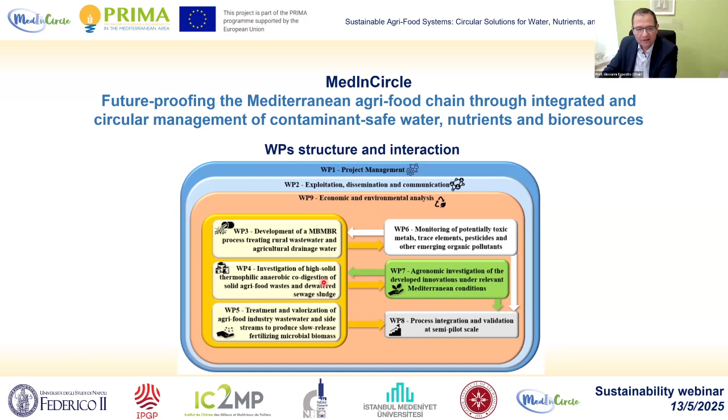Then we will move to working package 6, where Professor Erkan will focus on the toxic metals, trace elements, pesticides, and other contaminants that we want to remove from the water and solid before using them in the field. Last but not least, Professor Di Capua will focus on working package 4, on the high solid thermophilic anaerobic digestion to produce the digestate that we will recirculate in the field.

So here you have the program. I would like to soon give the floor to Professor Erkan to start with his presentation.

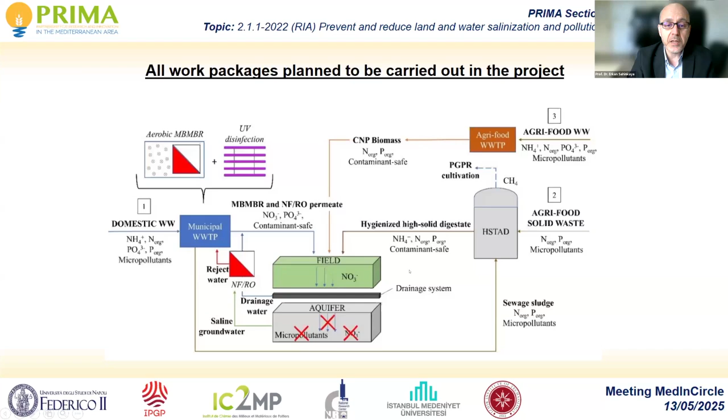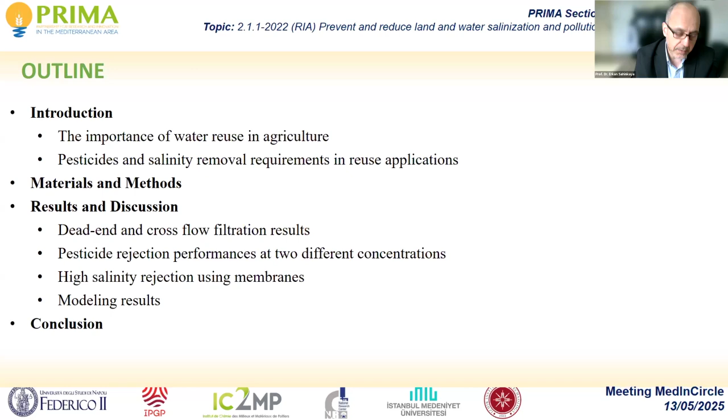Water scarcity is intensifying due to climate change, population growth, and agricultural intensification. Water reuse and recovery for irrigation purposes is a strategic need. Recovery and reuse ensure long-term water security in agriculture, so we have to focus on water reuse and recovery.

Reuse of drainage water is limited by residual agrochemicals, mainly pesticides, so pesticides and salinity should be removed if we want to use them for irrigation purposes. Modern agriculture relies heavily on pesticides for productivity, but their presence in drainage water poses both environmental risk and public hazards.

The use of pesticide is increasing every day. For example, in 2014 pesticide use was 2 million tons, but it increased to 3.7 million tons in 2022. So its usage is increasing every day.

Pesticide application is particularly high in developing countries, and lack of regulation and safe management practices increases contamination risks, so drainage water becomes a carrier of chemical pollutants. When we look at the breakdown of pesticide usage, most is herbicides around 53%, then fungicides 22%, and others a bit higher than 20%.

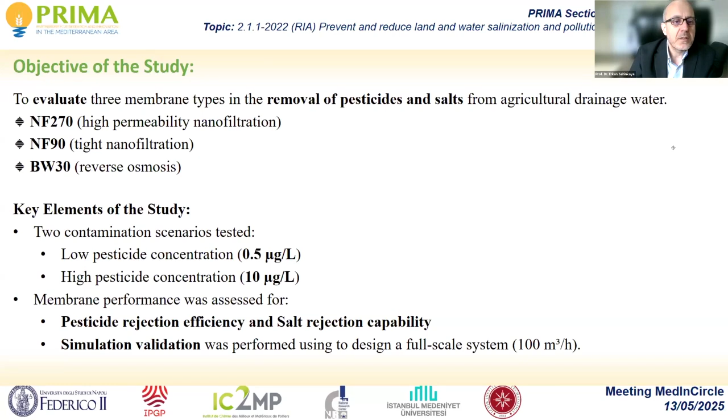For these purposes, we have selected 5 different pesticides: alachlor, atrazine, chlorfenvinphos, imidacloprid, and chlorsulfuron. Each pesticide has different molecular weights. If you look at the molecular weights, alachlor is... imidacloprid is the smallest pesticide, and chlorfenvinphos has the highest molecular weight.

In membrane application, not only molecular weight but also log Kow values, solubility, and other characteristics are important. The highest log Kow values belong to chlorfenvinphos, and the lowest are imidacloprid and chlorsulfuron. So molecular weight and log Kow values are important parameters in determining rejection performance in membrane processes.

This is the synthetic drainage water prepared in the laboratory. These characteristics are based on our field experiences. We have taken samples from both Şanlıurfa and İzmir in order to determine the characteristics of drainage water. As I mentioned, 3 different membranes have been used, 2 nanofiltration and 1 reverse osmosis.

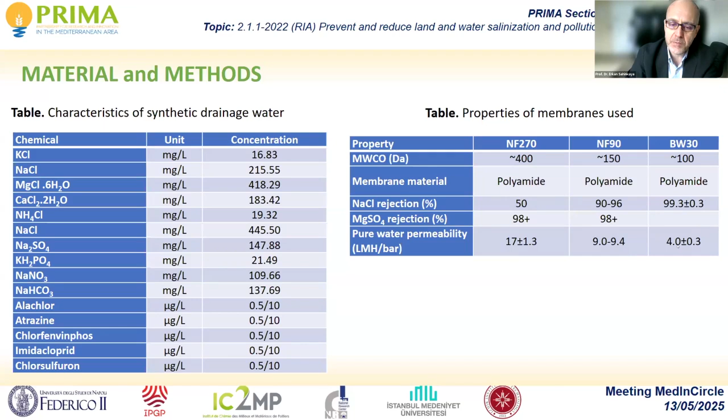When we look at the pure water permeability, nanofiltration 270 has the highest water permeability because it's the loosest membrane, and BW30 is the tightest membrane, with water permeability of only 4 LMH per bar. Here are the salt rejection performances. The best one is BW30, but it has the lowest water permeability.

In the study, we used dead-end and cross-filtration devices. In dead-end filtration, water is put into the holder of the membrane unit, and pressure is applied. Depending on the water recovery rate, the concentrate stream remains in the holder.

In cross-flow filtration, we used complete recycle mode. In this study, we returned both permeate and concentrate to the feed stream, trying to observe the steady state performance of the filtration processes.

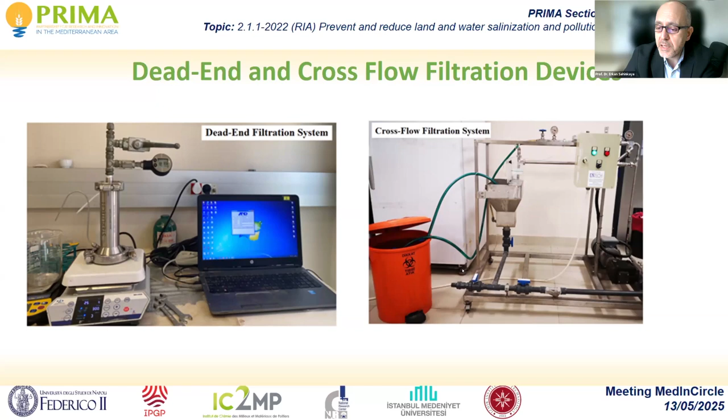As mentioned, we used two different contamination scenarios in determining pesticide rejection performance of drainage water. We also used very high saline groundwater and tried to remove salinity using reverse osmosis membrane, mimicking Egyptian saline groundwater, since one of our colleagues is from Egypt, where they have very high salinity groundwater that cannot be used for irrigation. We tried to use membrane processes to remove salinity and make it applicable for irrigation purposes.

Let's start with the pesticide rejection performance of nanofiltration and reverse osmosis. This is NF270 membrane performance shown for salinity removal and filtration performance. Flux decreased to around 60 LMH under 15 bar. Salinity removal was only partial, with chloride concentration decreasing from 600 to only 400 milligrams per liter.

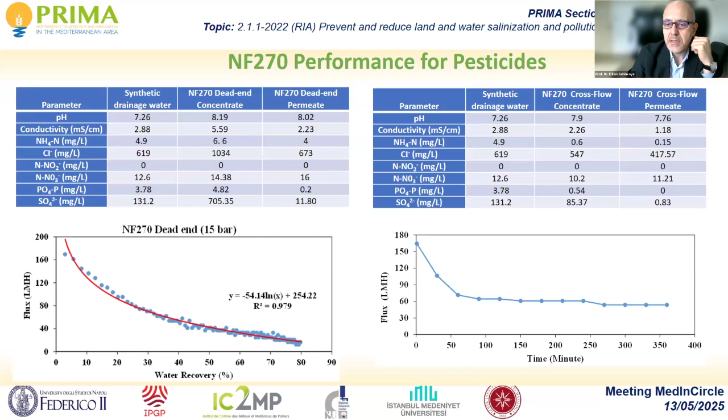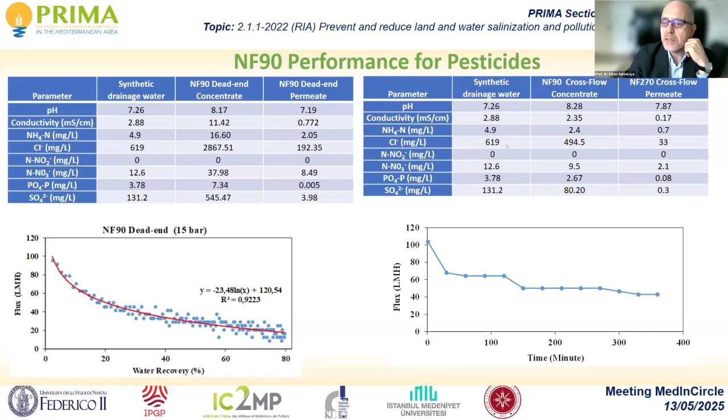For the other NF membrane, nanofiltration 90, flux decreased a little more, to around 40 LMH after 6 hours, but chloride rejection was much better, with concentration decreasing to around 33 milligrams per liter. BW30 is the tightest membrane, and chloride concentration decreased to 14 milligrams per liter. Its removal is highest among the reverse osmosis membranes, and flux decreased to 40 LMH during filtration.

The right side shows cross-flow filtration performance, and the left shows dead-end filtration performance. Dead-end filtration is important for determining the concentrate stream, while cross-flow filtration is important for permeate performance. In the dead-end filtration results, concentrate chloride concentration increased up to 5,000 milligrams per liter because the water recovery ratio was 80%, causing chloride concentration to increase to very high levels.

In terms of permeate quality, it may be better to focus on cross-flow filtration because it gives steady state conditions. But dead-end filtration shows how membrane flux decreases with different water recovery rates and how concentrate stream characteristics change. So both cross-flow and dead-end filtration results should be considered together.

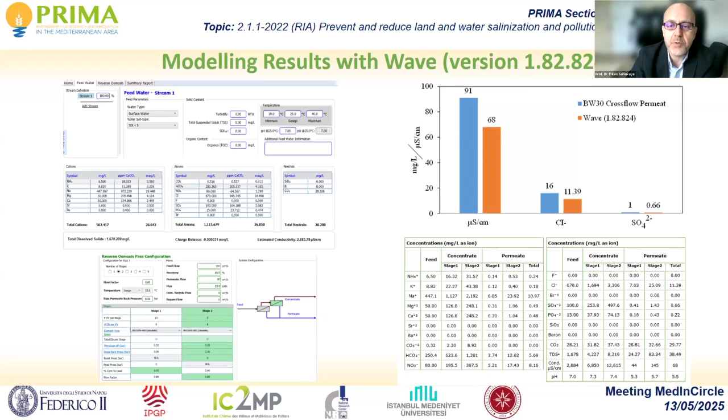Interestingly, the rejection performance of chlorfenvinphos with the loose nanofiltration membrane was very low. We didn't reject it well because it's an organophosphate pesticide and uncharged, so the nanofiltration membrane could not reject it at low concentration.

It's all at the low concentration, especially BW30 has always performance over 70%, and at the high concentration, NF90 and BW30 membranes gave over 95% or 98% removal rejection performances for the reverse osmosis.

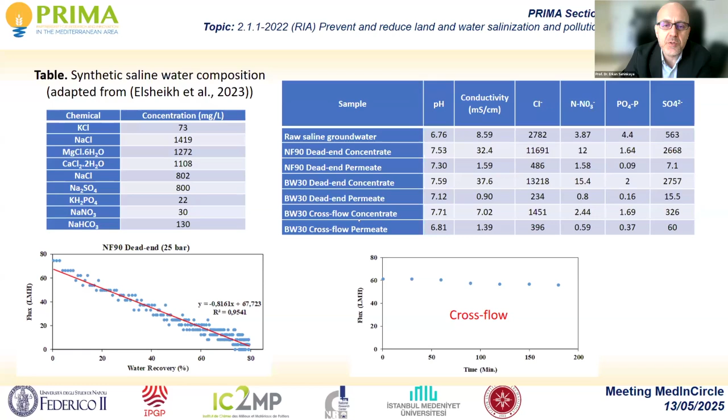We also tried to model the process using wave process modeling, and as you see, the modeling results are in good agreement with our results.

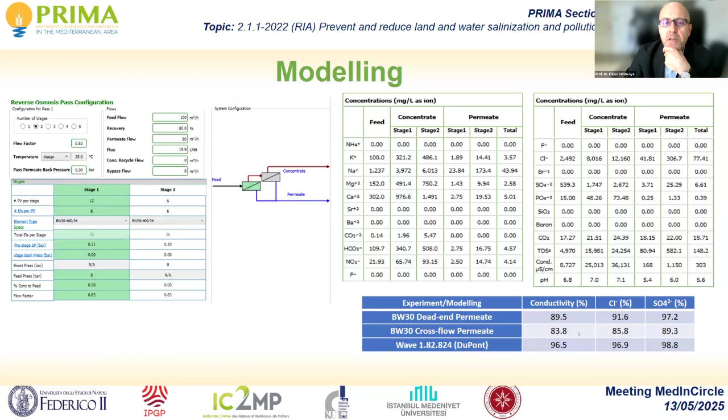So as a conclusion, we have evaluated 3 different membranes for the removal of pesticide and salinity. It seems that membranes are good options for removal of micropollutants. Especially if you use NF90 and reverse osmosis membranes, you can reject pesticide with over 97% rejection performance. Also, modeling results are in good agreement with the laboratory studies, so you can use the modeling approach to design a full-scale process.

It seems that the energy consumption for treating agricultural drainage, per 1 cubic meter permeate water, is only 0.55 kilowatt hour. So as a practical implication, membranes support water reuse in agriculture, and membrane processes are suitable for regions with water scarcity and pesticide exposure.

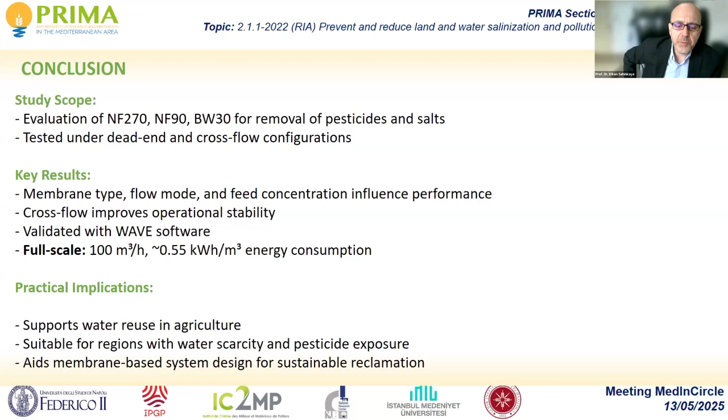Full-scale application can be used to recover water for irrigation purposes. Thank you very much. If you have any questions.

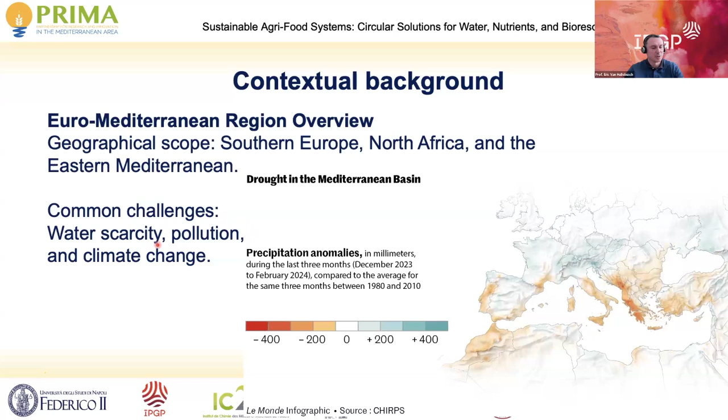So all the countries are facing water scarcity, mostly due to climate change, and then we also have issues with pollution, as was previously introduced by Erhan. We also know that agriculture is a significant contributor to water stress in countries with high levels. You can see here that Northern African countries and Eastern countries are very much affected by water stress, mainly because of agricultural withdrawal from the resources.

So treated wastewater reuse is a key solution, or one of the key solutions, to water challenges, because it allows us to answer issues of water scarcity. It comes as a complement to freshwater resources. It will also mitigate the impact of climate change, and it will also address the needs of agriculture as well as urban needs.

By reusing water, we will reduce withdrawals from aquifers and rivers. That will also lower the discharge of water in the natural environment. It will support irrigation, aquifer recharge, urban cleaning, industrial use, and even drinking water production could also be one of the challenges that we can address.

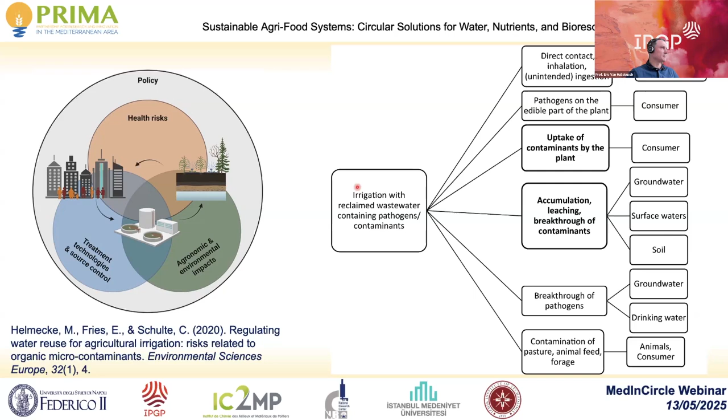There is also policy regarding this, aiming to ensure safety and trust, so people should accept that water reuse is done in a good way, preserving health and the environment, making people confident, and ensuring we enforce the standards.

In the European Union, in 2020, there's water reuse regulation which was enforced, establishing minimum quality requirements for reusing water. This mostly focuses on pathogens, suspended solids, and BOD. This regulation includes mandatory risk management procedures, requires enhanced monitoring systems, and applies only to agricultural irrigation, for crops for human or animal consumption.

Member states still have some flexibility in other uses like industry, urban cleaning, aquifer recharge, and so on. This regulation establishes harmonized minimum water quality and monitoring requirements across all EU member states. It promotes safe reuse of treated urban wastewater in agriculture, supporting circular economy and enhanced water resource sustainability, along with risk management.

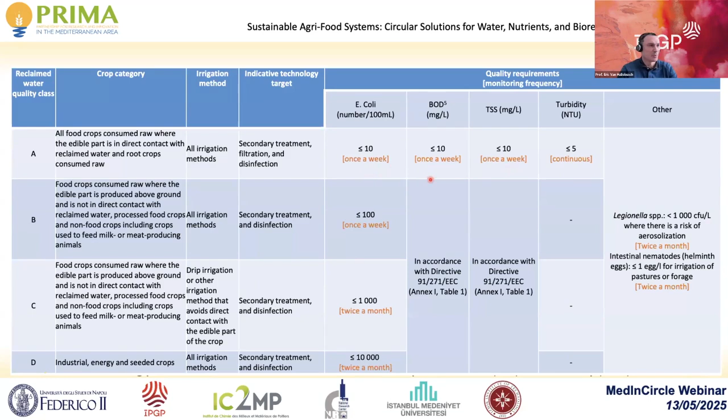Then if we go to France, as an EU member state, the national regulation aligns with EU directives. There have been several updates very recently; in about one year we got 8 new legal texts, including the decree of August 2023, which also simplifies the authorization procedure. One of the hurdles is to get authorization to reuse water, which has been seen for a very long time as a difficult point, and also expanding permissible uses of treated water. That has been shown, demonstrated as a bottleneck for water reuse in France.

Of course, the quality classification is about the same as the EU directives.

The national target is to initiate by 2027 about 1,000 reuse projects, and to increase the reuse rate of treated water to 10% in 2030, which is much higher than the current rate of 1%.

If we look at Italy, it has been one of the leaders in wastewater reuse, especially for agriculture. They have a ministerial decree from 2023 which regulates the uses, especially in agriculture. Local authorities have flexibility to issue permits, which encourages project development. Many projects have been focused in the south of Italy, in Sicily for instance, where they have issues with drought conditions. As an EU member, Italy has to comply with EU regulation, and they had to comply by 2023, which they have done.

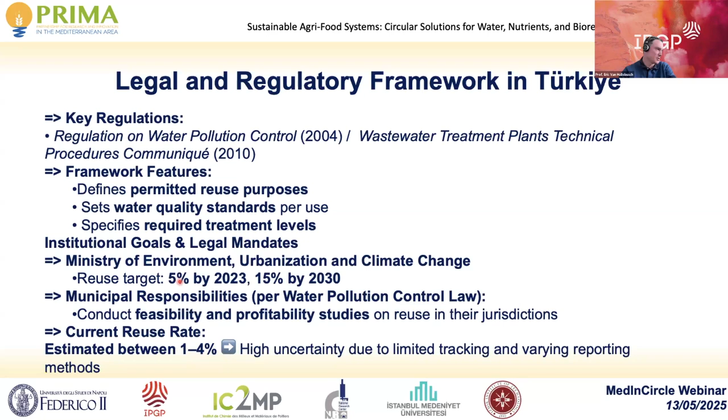To sum up, the core concept of regulation is to ensure water quality thresholds. All water reuse regulations define quality standards, which are often structured into classes associated with specific uses. There are two types of systems: single class systems, with one standard for many uses, or multi-class systems, meaning different standards per use of the water.

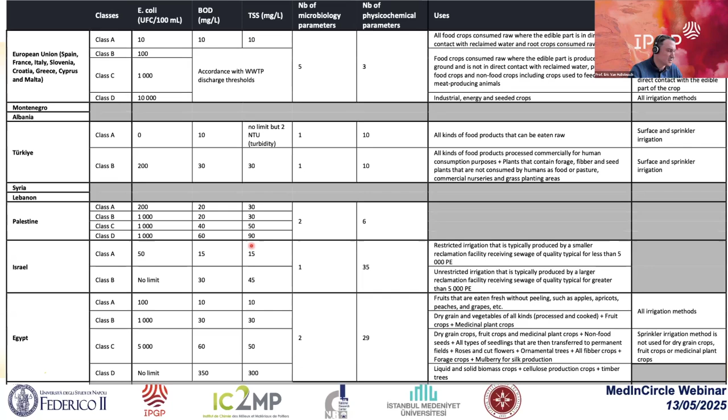So that's something which is also important to consider. And then to conclude on my presentation, first, there is a need for harmonizing standards across all the region. So this is happening. This is gradually happening for water.

Of course, when you are dealing with water quality or reuse water quality, you are also trying to address issues on soil contamination, on food quality. So this is done to reduce transboundary risk. If you get food from one country which is not aligned with the regulation of Europe, for instance, it may generate some risk for selling the food in Europe, and the other way around. So we have to adapt European benchmark to local context, ensuring trade facilitation and hence public health protection.

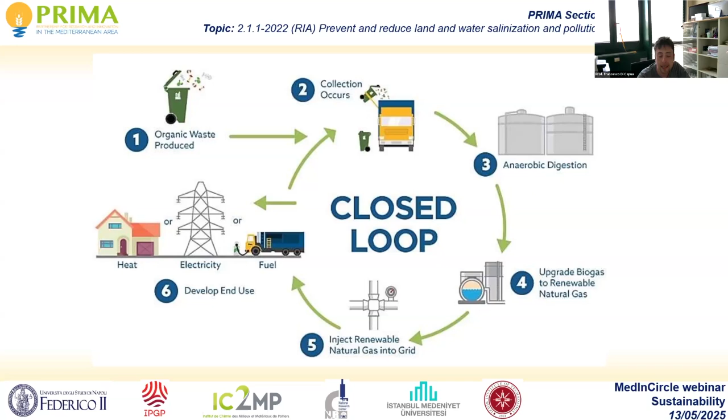So we are all familiar with the concept of circular economy. Based on this concept, the organic waste should be reintroduced into the production cycle, and we can do that with a variety of organic waste. For instance, food waste can be collected, processed through anaerobic digestion, used to produce biogas and digestate. The biogas can produce energy that we can use in our productive activities to generate other food, to clean wastewater, generate sewage sludge, and the digestate can be applied on the field to produce food, which then produces other waste that can be reintroduced into the cycle. So we have this closed loop that can be used to valorize the organic waste that we have. We can produce a lot of organic waste with our activities.

Among these, we have the sewage sludge that is produced in wastewater treatment plants. We have lots of agricultural residues, animal manure, and of course, food waste. All these organic wastes are highly available. We can find them almost everywhere, and they are continuously generated.

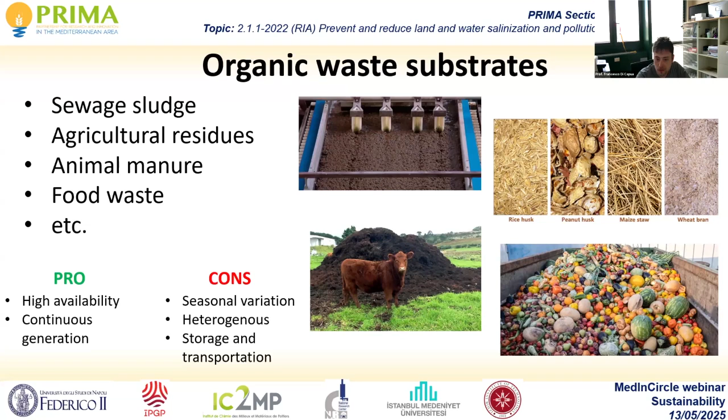They have also some cons, like seasonal variation, so in some times of the year we can find more of this waste than in others. They can be quite heterogeneous—let's think of lignocellulosic materials. Also, the storage and transportation of these substrates to the valorization hub might be challenging because of their availability and their emissions, in terms of odors for instance. So this is something we should take into account.

How can we process this waste? There are several ways. We can have a physical treatment resulting in the production of solid fuel—think of lignocellulosic materials that can be crushed, ground, dried, and pelletized. Then we can process them through thermochemical treatments such as combustion, gasification, torrefaction, pyrolysis, hydrothermal liquefaction, or carbonization. With all these treatments, we can produce several streams—gaseous, solid, and liquid—such as biochar, syngas, bio-oil, and so on.

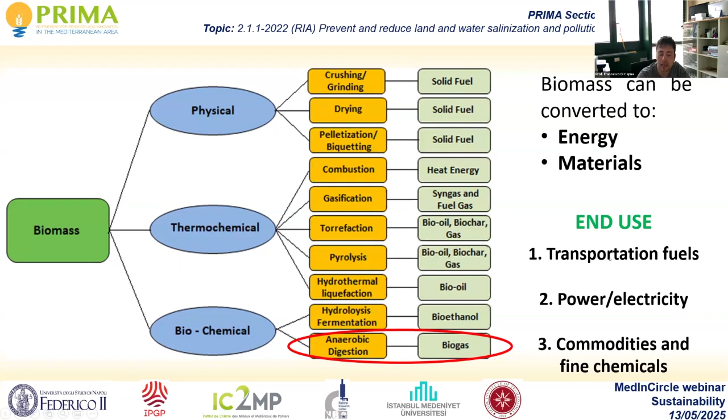Also, we can treat these organic wastes through biological treatments such as fermentation or anaerobic digestion, which produce biogas. Overall, with all these processes, we produce energy and materials, and the main end products are transportation fuel, power and electricity, and commodities and fine chemicals.

Let's focus on the anaerobic digestion process and how this works. This is a multi-step process that starts with hydrolysis of macromolecules, such as carbohydrates, protein, and lipids, to produce smaller compounds—sugars, amino acids, and fatty acids—that can be fermented into even smaller molecules, such as volatile fatty acids, alcohols like ethanol, and other carboxylic acids like non-volatile fatty acids, lactic or succinic acid for instance.

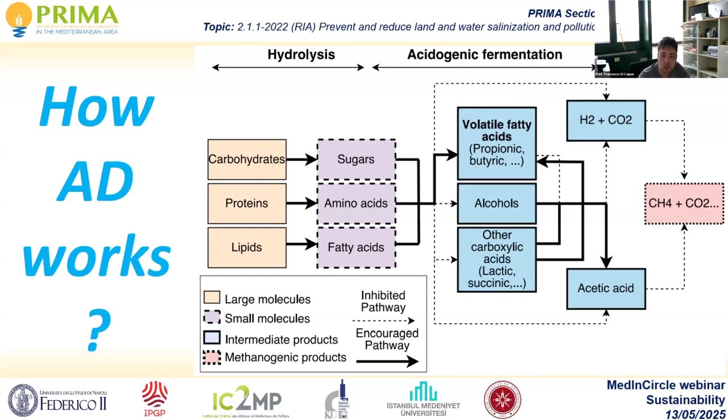From these compounds, we can have an acetogenic phase to produce acetic acid that can then be converted into biomethane, which is the main product of anaerobic digestion. The same can be produced through hydrogen and CO2, with the process known as hydrogenotrophic methanogenesis. So in the end, we mainly produce biogas as the gaseous stream.

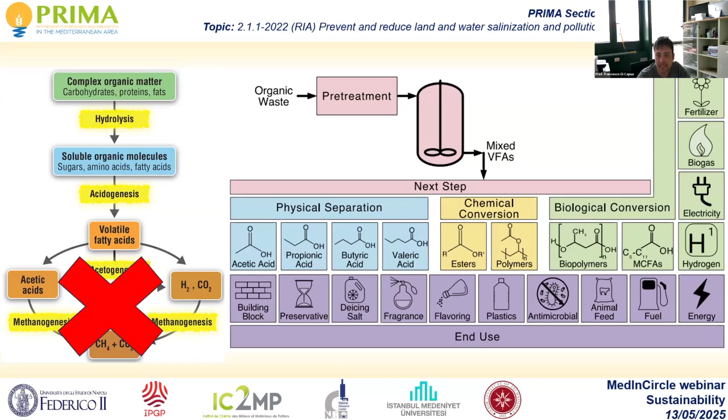We could also think to cut the digestion process at the fermentative step, produce volatile fatty acids, and use these for producing platform chemicals, fragrances, and preservatives through physical separation of the single volatile fatty acids. We can convert them into esters and polymers for production of plastics. We could do biological conversion, producing biopolymers or longer carboxylic acids like medium-chain fatty acids used in industry. We can also produce hydrogen and biogas through complete anaerobic digestion for production of electricity, and also obtain a digestate that can be used as fertilizer.

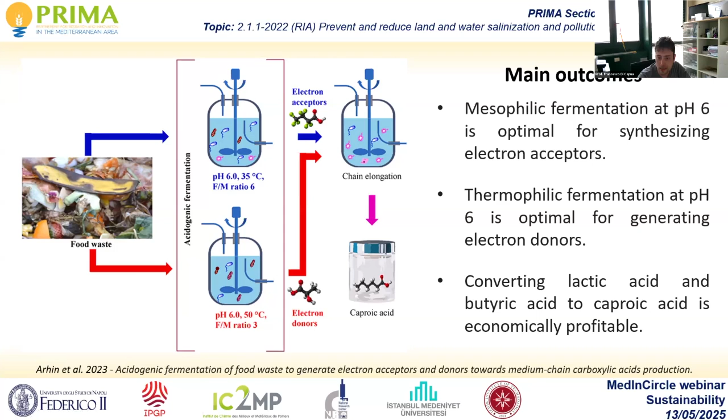For instance, this is one study we performed in our group for the valorization of food waste through acidogenic fermentation, optimized to produce electron donors and electron acceptors for the chain elongation process, to produce in the end caproic acid, a medium-chain fatty acid that can be used as a platform chemical in the pharmaceutical or cosmetic industry. But let's focus on the complete anaerobic digestion pathway.

In this case, we have two main outputs. The biogas can be used to produce electricity and heat, as a vehicle fuel, and can be upgraded to biomethane and injected into the gas grid. Then we have a solid residue, the digestate, which has a very good composition in terms of organic matter and nutrients, and therefore can be used as an organic fertilizer, as soil amendment, or also for the production of building materials or as animal bedding.

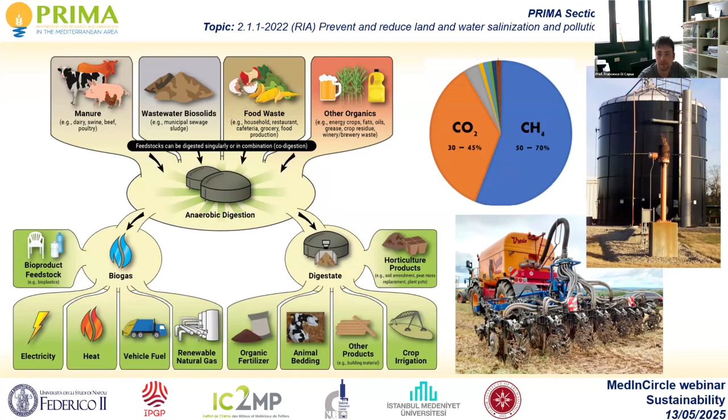What happens in conventional municipal wastewater treatment plants? Here we have the anaerobic digestion process that produces biogas and digestate, as I said. In the digestate, we have about 27 to 30% of the influent COD that we have in the wastewater. This process is performed at a TS content between 2 and 5% in municipal wastewater treatment plants, and is therefore also known as low-solid anaerobic digestion.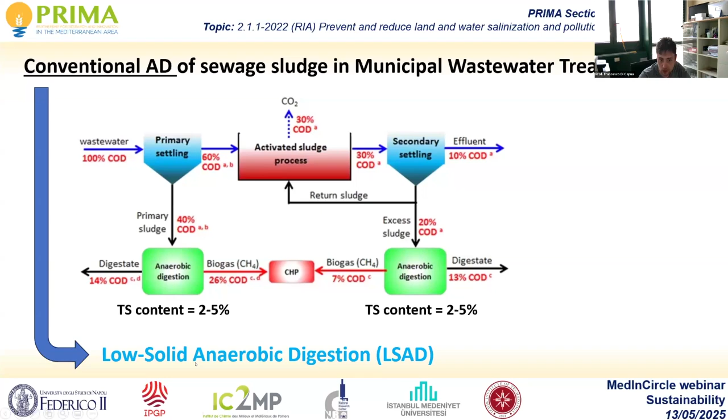This anaerobic digestion process is not always foreseen in wastewater treatment plants, for many reasons: limited space, high investment cost, or because an aerobic treatment had been planned from the beginning. Also, sometimes anaerobic digestion is not efficient because it's performed at ambient temperature, and we know it must be performed at least at mesophilic temperature to have significant biogas production. And sometimes, depending on how the plant is operated, we have small sludge production, and therefore the biogas production is also quite low, so the anaerobic digestion is not efficient.

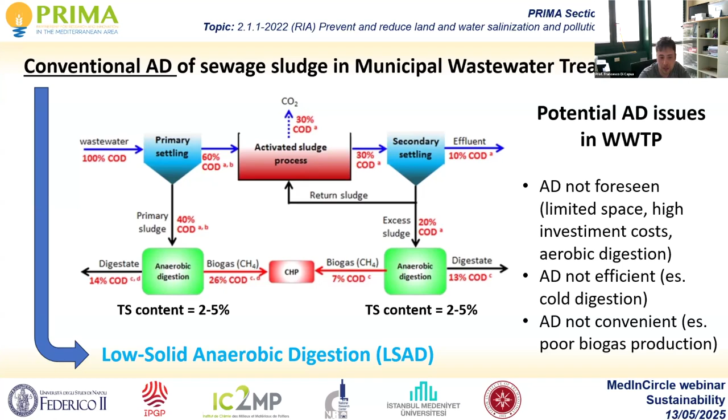There is another way to operate anaerobic digestion: centralizing the process by transferring all the produced sewage sludge into centralized plants that perform anaerobic digestion at high solid content. The sludge is first dewatered to reduce volume and make transportation more convenient, then transferred to these big sludge processing hubs that perform anaerobic digestion at high solid content, usually above 6%.

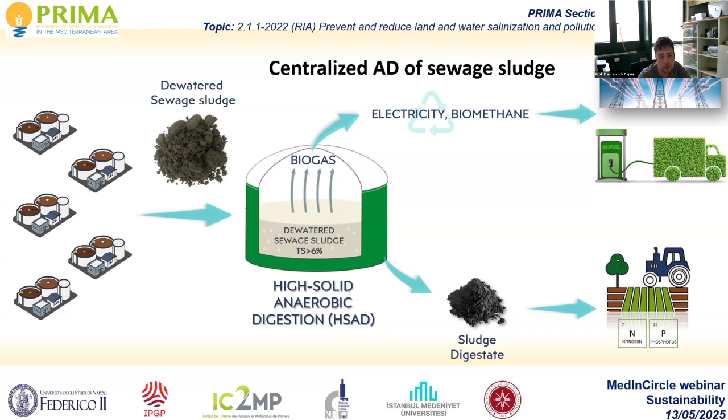These plants produce electricity, can upgrade the biogas to biomethane, and produce digestate that must be applied on land. This is a must for centralized plants because they produce a huge amount of digestate, and it must be applied on land in order to dispose of it, but I would say also in order to valorize the sludge.

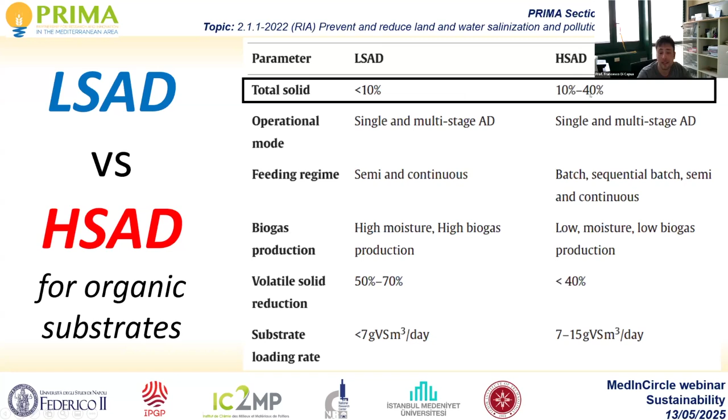When we focus on the difference between low solid and high solid anaerobic digestion for organic substrates, except for sewage sludge, we can say we have low solid anaerobic digestion when total solid content is below 10%, while when we are in the range between 10 and 40%, we talk about high solid anaerobic digestion. This is true especially for lignocellulosic materials, food waste, and similar organic substrates.

One disadvantage of high solid anaerobic digestion might be lower volatile solid reduction, because the organic matter is a little less accessible with the high solid process as there is less water. So the microorganisms find it a little more difficult to access the organic matter and convert it into other substrates and into biogas.

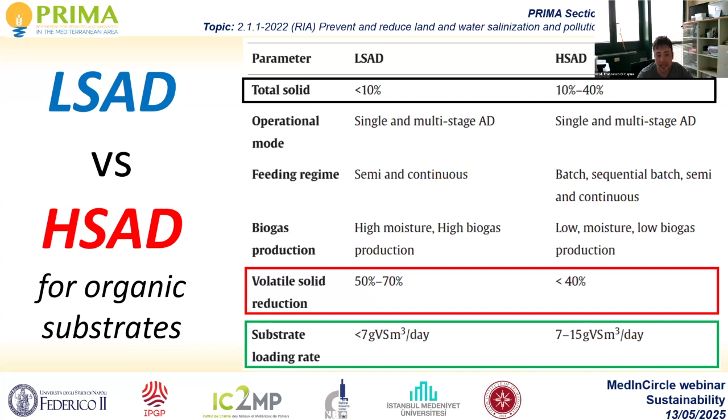On the other side, we can process more organic matter at the same time because the initial TS content is higher. So if we maintain the same hydraulic retention time in the digester, we can have higher organic loading rates.

Another disadvantage is that substrates with high solid content are a little more difficult to move, so we have to use special pumping equipment, which is also more expensive. This is an additional cost for the plant.

But we also have a lot of advantages. For instance, we can make smaller digesters if we want to use the same organic loading rates. We have less water, meaning we use less energy for heating the digesters. Also, the digestate we produce does not need dewatering because it is already dewatered, with very little water in it, so it can be disposed of or better applied on land directly.

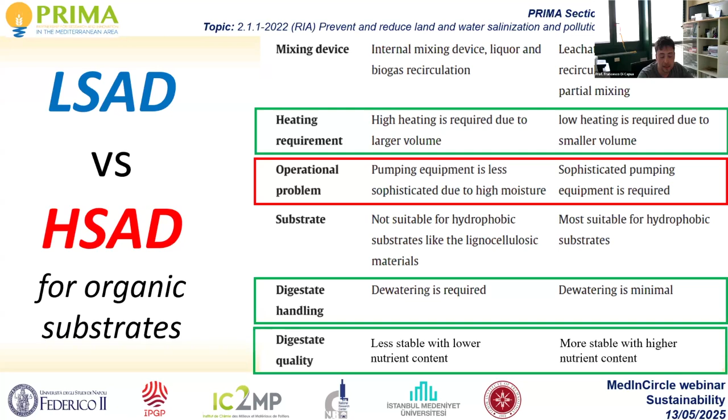Also, the quality is generally better because high solid anaerobic digestion is often performed at thermophilic temperature and has better nutrient content and better hygienic properties.

In the end, if we focus on high solid anaerobic digestion of sewage sludge, we have many opportunities such as higher biogas production, and lower cost for transportation of the digestate because it has to be applied on land close to the plant.

We can build smaller digesters using the same organic loading rate, and we produce digestate that is very good in terms of nutrient and hygienic properties.

The challenges might be slower hydrolysis because there is less water, and also the presence of flocculants in the sludge that makes stronger aggregates, so it's more difficult for bacteria to access the organic matter. The viscosity is quite high, so we have difficult rheology, making pumping quite difficult.

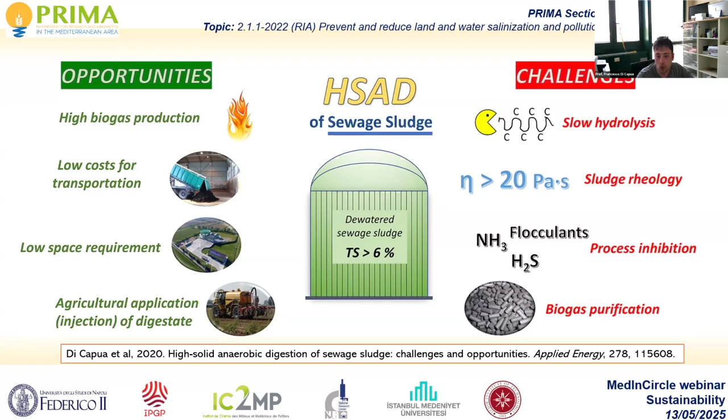We may produce more inhibitors during the process, such as ammonia and hydrogen sulfide, and therefore the purification of biogas might be more challenging.

As I said, the slower hydrolysis depends on the difficulty in breaking the cell membrane, higher EPS concentration, and the presence of floc aggregates in the sludge. The high viscosity depends on the floc aggregates and on the low water content in the sludge.

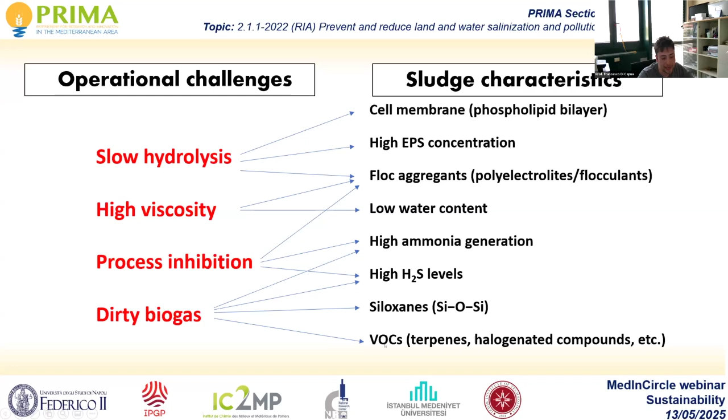The process inhibition is due to high ammonia production, high hydrogen sulfide production, and we have a dirtier biogas compared to conventional digestion, due also to the presence of siloxanes, with silicon in it, and volatile organic compounds that may cause damage to metallic and plastic installations in the plant.

Also, if we perform this at thermophilic temperature, as is usual for high solid anaerobic digestion, we can have higher biogas production and more hygienic digestate because of the higher temperature, but also because we have higher free ammonia levels that are more effective in inhibiting pathogens such as Salmonella. We also have a microbiome that can withstand higher levels of free ammonia.

We have to be careful when we introduce a sudden increase in the nitrogen content of the feedstock, because working at higher temperature makes the ratio of free ammonia to total ammonia higher. So when we introduce nitrogen into the system, it is mostly transformed into free ammonia, which is more inhibitory for the bacteria, especially for the methanogens.

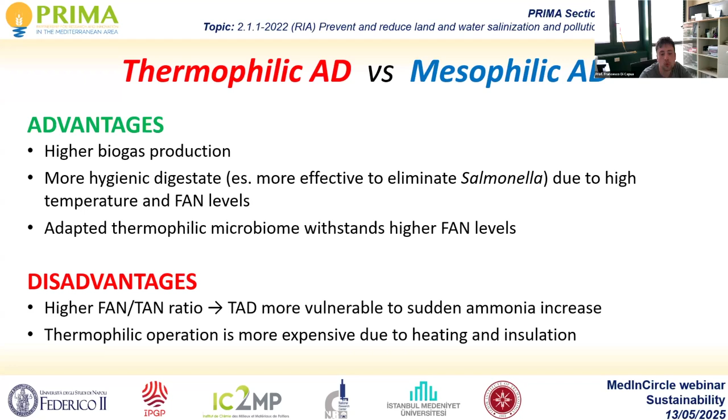Also, we know that thermophilic operation is more expensive because we have to provide more energy for heating and also make better insulation of the digesters to try to keep the heat inside.

There is a process called co-digestion, in which we process not only one substrate, like sewage sludge or food waste, but we couple different substrates together and process them in the same digester. This can be advantageous compared to monodigestion with a single substrate, because with co-digestion we can enhance the production of biogas and enhance solid reduction.

For instance, ammonia inhibition can be alleviated because by mixing different substrates we can have a more balanced carbon to nitrogen ratio inside the digester. At the same time, we can reduce the inhibition of other substrates by selecting specific feedstock to co-digest. We also have a more resilient and robust microbial population because it is more diversified.

We can optimize the mixing ratio among the feedstocks to obtain a better digestion process. We can reduce sludge viscosity because if we have a feedstock that is very viscous, we can mix it with a less viscous substrate and enhance mixing inside the digester. Also, digestate quality can be improved because we process different substrates together to get a digestate more balanced in terms of nutrients - nitrogen, phosphorus, and potassium - and therefore with better fertilizing properties.

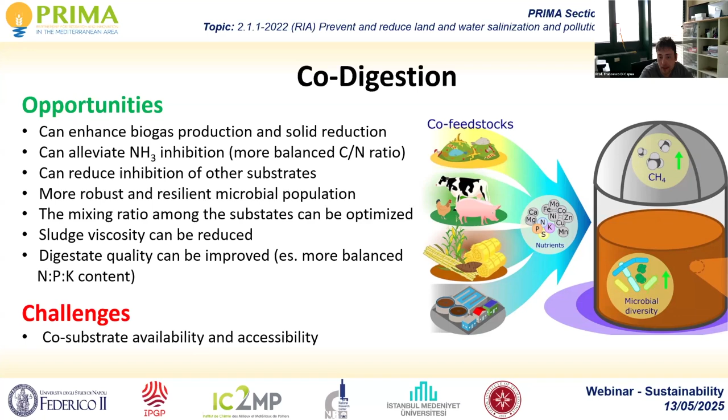The main challenge of co-digestion is the availability and accessibility of different substrates, because we need to collect different substrates in the same place, and this is not always easy since they are not generated in the same place. We have to collect them from different places, transport them to the same place, and process them together in the right amount and ratio. So this might be one challenging aspect of co-digestion.

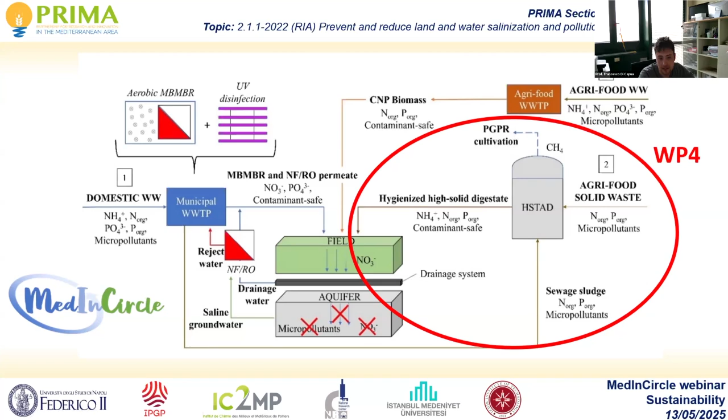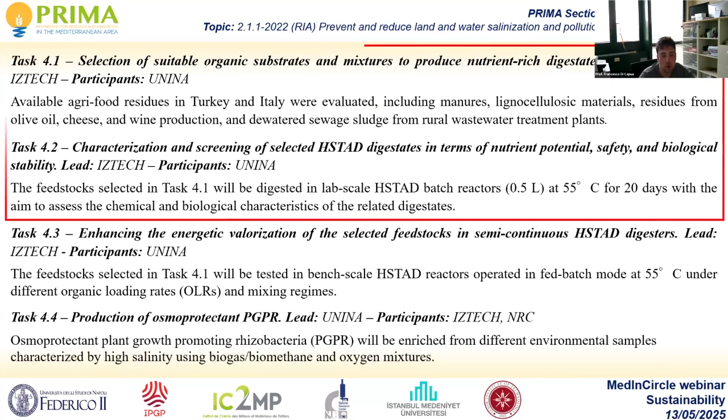Regarding our MedInCircle project, there is a specific work package focusing on high solid thermophilic anaerobic digestion of different organic substrates, including agri-food solid waste and sewage sludge generated by the innovative municipal wastewater treatment plant system described earlier by Professor Shahin Kaya. We have different tasks for this work package, and I will focus briefly on the first two.

In task one, we performed a literature survey to select the most common and available organic substrates in the two countries mainly involved in this work package, Italy and Turkey. We defined the annual amount produced in each country to understand the availability of these substrates for co-digestion. We also characterized their physical and chemical properties to understand their nutrient content, biomethane potential, and heavy metal content, in order to know them better and decide what substrates to co-digest.

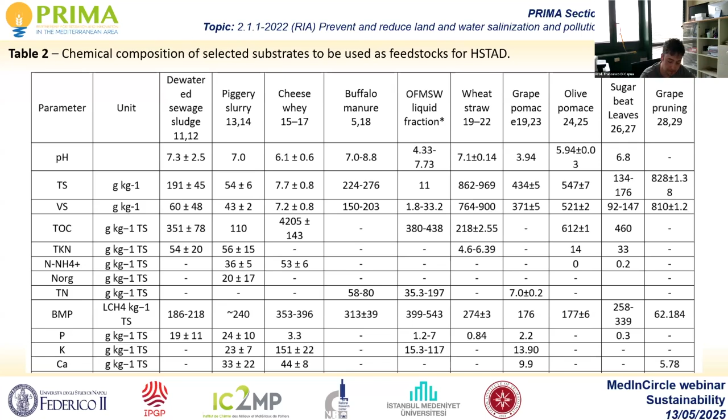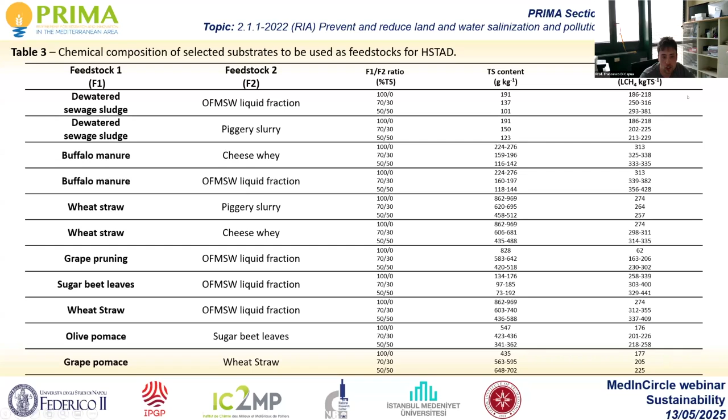We also planned our experiments, calculating the total solid content of different co-digestion mixtures and the expected biomethane potential from the co-digestion reactor. Then we selected the different substrates for both Italy and Turkey.

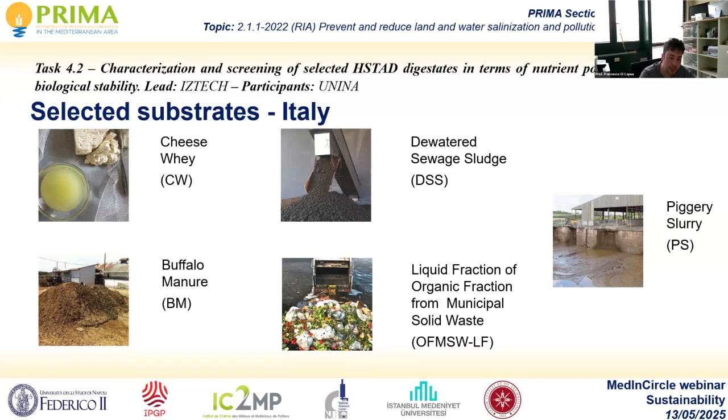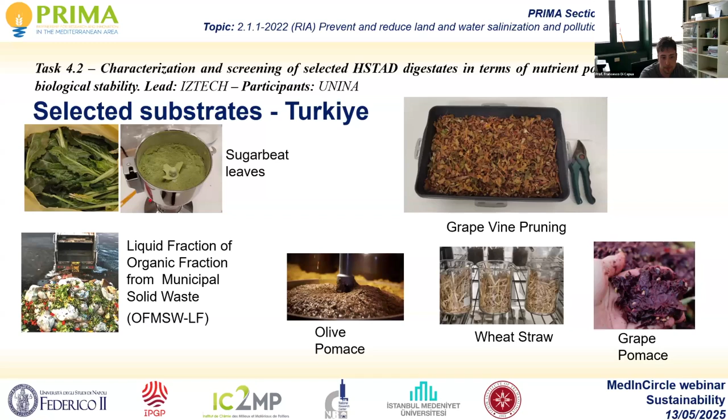In Italy, we selected cheese whey, buffalo manure, dewatered sewage sludge, the liquid fraction of the organic fraction of municipal solid waste, and piggery slurry. For Turkey, we focused more on lignocellulosic materials, selecting grapevine pruning, olive pomace, wheat straw, grape pomace, sugar beet leaves, and also the liquid fraction of the organic municipal solid waste.

We characterized all these substrates. These are the substrates collected in Italy, mainly in the Campania region where Unina is located. There are very typical substrates like buffalo manure, a very typical agricultural activity in Campania, but we also collected some from northern Italy, so these are representative of the whole country.

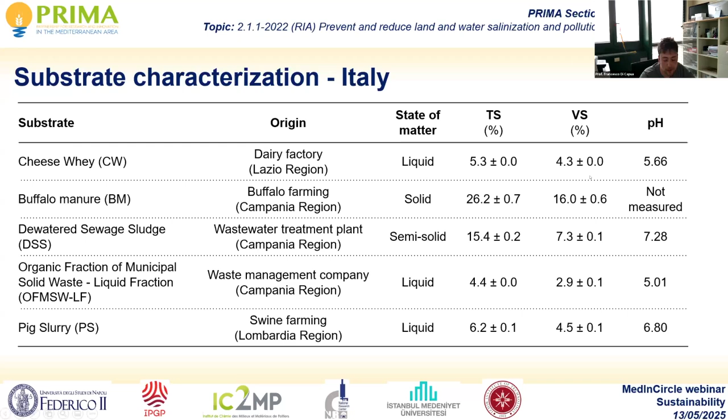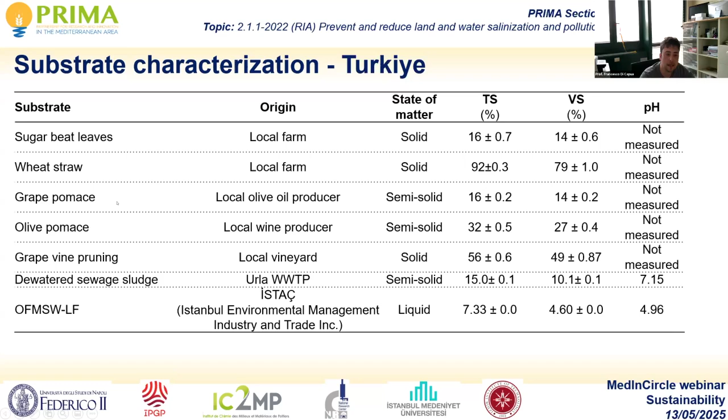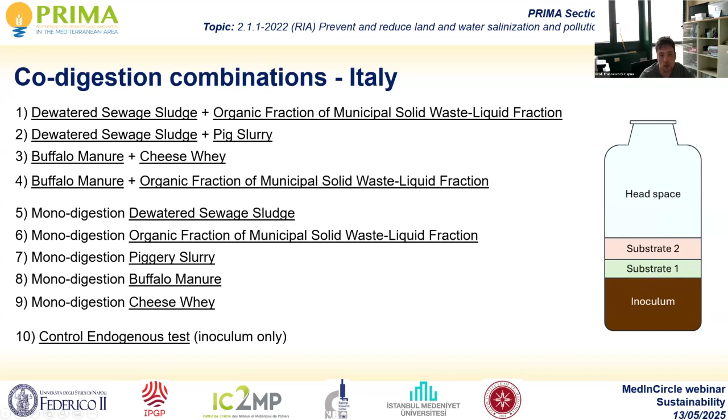We characterized them in terms of solid content, pH, and total and soluble COD, and did the same for the substrates selected in Turkey. Then we selected potential combinations of these substrates that we thought could improve the anaerobic digestion process compared to the single substrates, defining co-digestion experiments and comparing them with monodigestion. This was done for substrates collected in both Italy and Turkey.

These are the experimental conditions. We worked at thermophilic temperature. The total solid content was in the range of 9.5 to 11.5, so in the range of high solid anaerobic digestion. The inoculum to substrate ratio was 2:1.

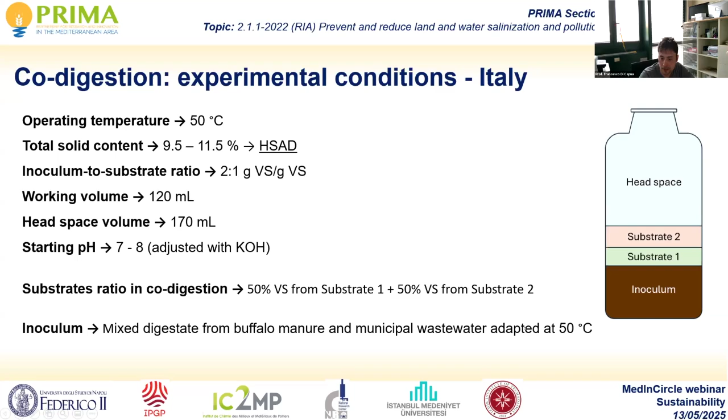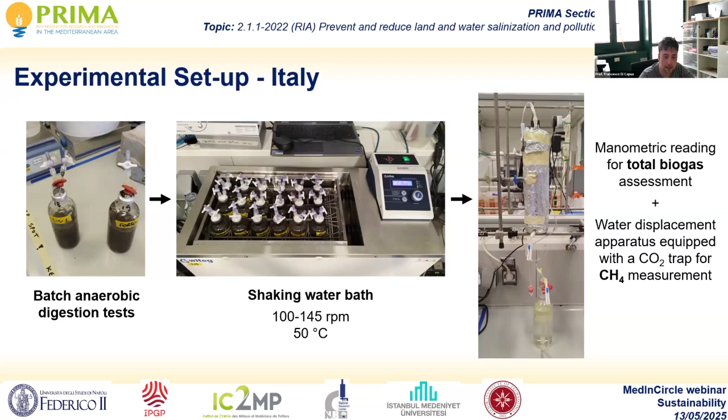This is an example of our experimental setup, with the water bath at thermophilic temperature. This is the system we used for monitoring biogas production and biomethane production from our reactors.

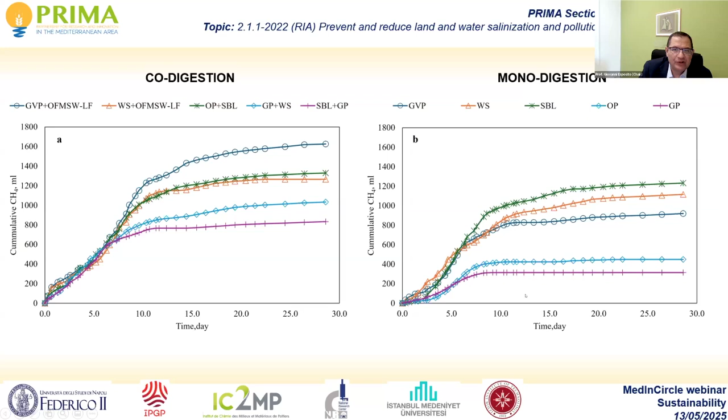These are the results shown in Napoli, which basically also show that co-digestion can actually improve the biomethane potential of some substrates.

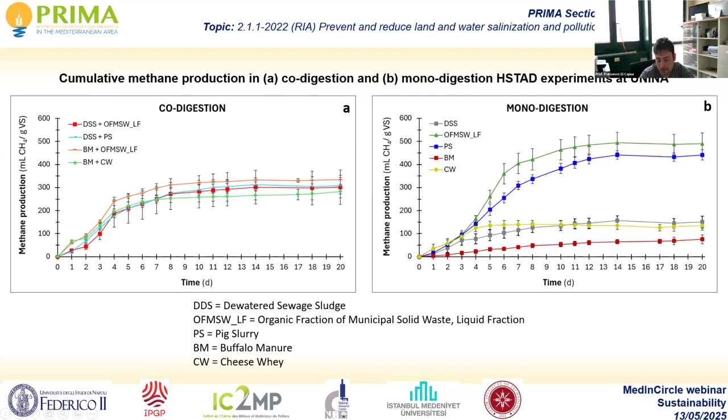Of course, when we focused on piggery slurry and the liquid fraction, we got higher biomethane potential because they are supposed to have a higher biomethane potential.

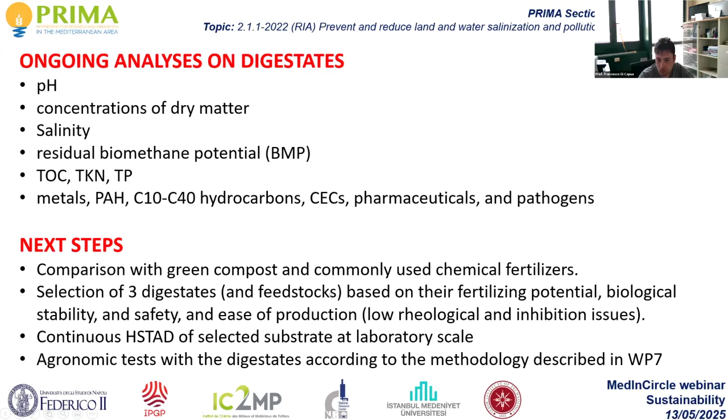We will focus on further analysis to characterize the digestate, and the next steps will include continuous bioreactor operation, comparison with commercial fertilizers, and agronomic tests with the digestate produced from the co-digestion reactors. That's all, thank you very much.